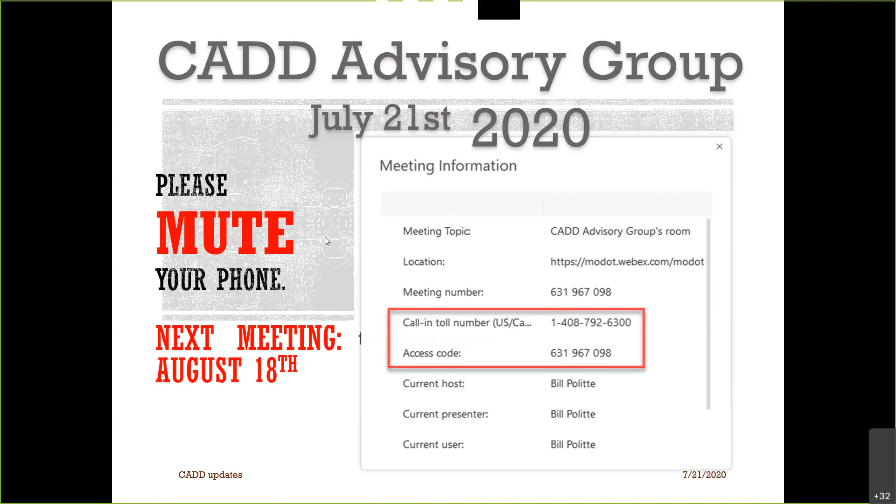Okay, got a few things we're going to go over today. I'll get to them when we get to it, but I'm going to keep this going with the support working from home thing. The email is the best way to get a hold of us. You can email us at CADD support and we'll all get the email.

Or if you have a specific problem, there'll be a slide at the end that shows all our disciplines, and you can contact us that way. Another way is instant messaging - Skype works really well, and Microsoft Teams is working out really well too. We can share screens and see what you're working on, and that stuff is really handy for what we need to do. So we'll keep doing that.

Classroom schedule - there's no face-to-face classes scheduled for August. I don't know when we're going to go back to the classroom thing, but we'll let you all know when that happens, and push out some mass emails on that.

I'm going to leave this in the PowerPoint. The month's videos and PowerPoint will be placed on the Geopack blog, and there's a link to it on this page as well. So I'll leave this all on the blog, and you'll be able to access the PowerPoint, click on these links and go. There's a lot of stuff out there, especially on our CAD services page and the blog page.

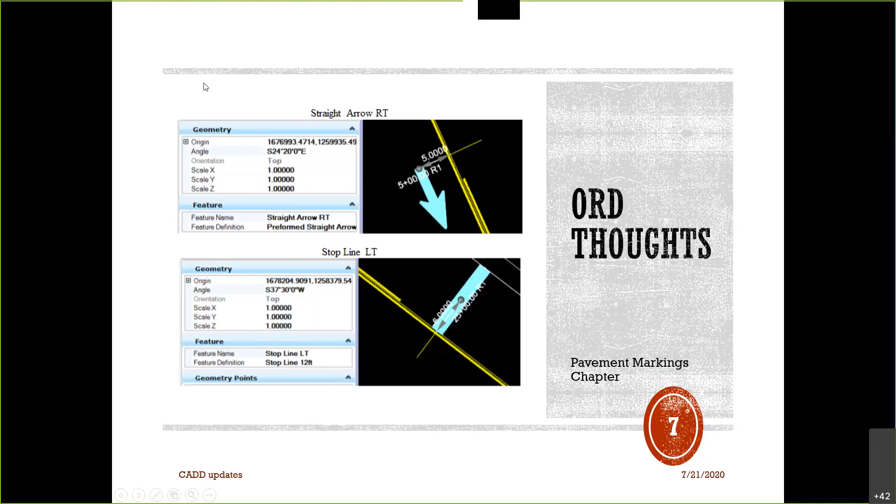More ORD thoughts. Right now when we cut cross sections and create our PDFs, our cross sections are created from the bottom left and go up. So if you're doing multiple cross sections, you start at the bottom, go to the top, then move to the next row and do the same thing, going as many rows as needed, squeezing them all in for your sheets.

We've got a request to change it so we go from the top to the bottom instead, then move to the next row and do the same thing all the way down. This would let you open a PDF and scroll through, seeing each stationing at the top all the way down, instead of having to move to the bottom of the sheet and back up to the top for the stationing. So it's another one of those thoughts we need your comments and input on, on what would be a good resolution to this. Just throwing that out there.

Okay, so that's basically the pieces I've got to say. I'm going to show a video here and hope it works out well. I'll have Shannon or Kevin give me a yell.

I'll say a little something about this. This is what Bill's getting ready to show, the AQCESSRAMP demo from Transoft Solutions. I recorded a video because our demonstration license runs out today and I wasn't sure it would actually work for us today. So this is just going to be a video, it's out there on our YouTube page as well. It goes through a bit of what it will do. It deals with ADA ramps, so if you're creating sidewalks or anything like that, this would really help in creating ADA ramps to get your elevations and widths of pavement and things like that.

Bill, did you share this with the video version? Does it look bad? No, I don't hear anything. It looks good but there's no sound, Bill. Okay, you guys can't hear that? Let me try something different. Hey Shannon, did you mention that we don't own this software, that we're just demoing it? I think you said that but I wanted to point that out. Yes, correct.

So Shannon, if he can't get the sound going, do you think you can lip sync to it or not? Oh, I'd rather not, but I probably could, I guess. There it is, I hear it.

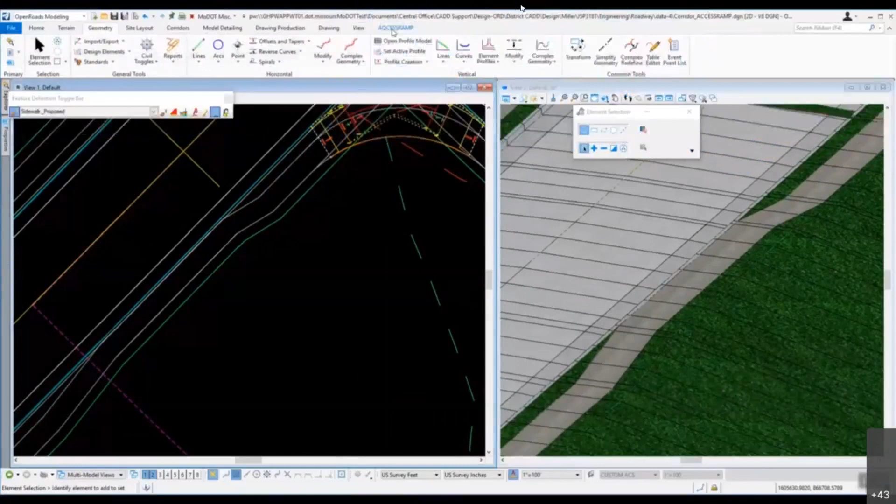A new program called AQCESSRAMP. You guys hear that? It's by Transoft Solutions, the makers of AutoTurn, TORUS Roundabouts, and the Diamond Interchange tools that we currently own and operate.

When it's installed in ORD, you can see it's got its own ribbon area. When you expand that out, you'll see all kinds of different tools, similar to the rest of the Transoft tools. First you have settings, which will load up the license and the program, and your normal program settings for dealing with feet or inches. Then there are design guidelines - right now I just have Missouri DOT and the ADAAG, the default from Transoft. As you can see, they've been working with a lot of different states getting their standards, and we sent them our standards some time back, so they're using our curbs, curb heights, and different curb types to create these access ramps. Overall, the tool is designed to create all the line work and even a surface for an ADA compliant sidewalk or curb ramp in different locations.

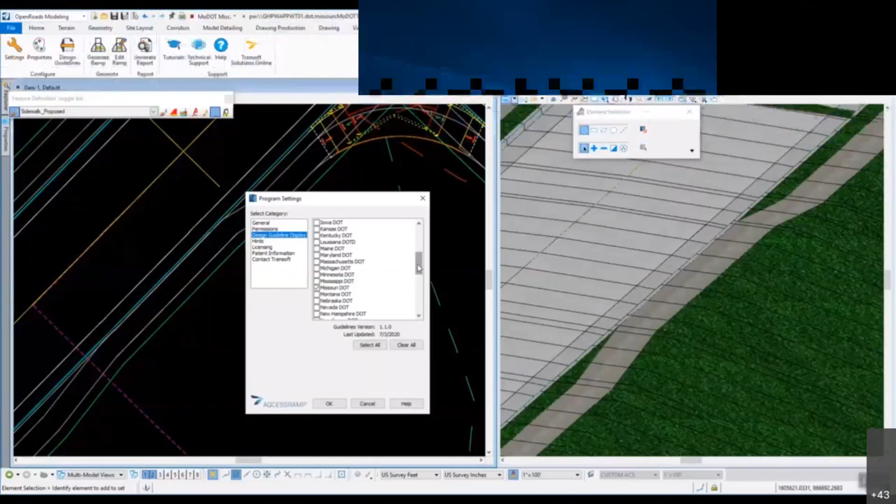You can see I have one drawn back here already. The one I'm going to show deals with this location where I want an ADA ramp that might go across a curbed roadway. I created one here earlier that also does the arc inside a radius return for an intersection, and it completes all this information. You can go modify it after it's been placed, modify the length, modify the elevations of certain points on there.

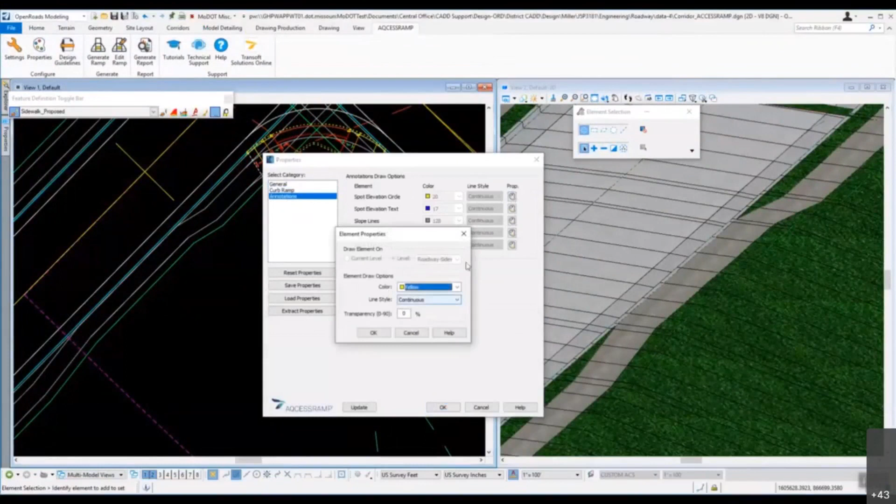Most of the rest of these things are just informational in here. Then there's properties, so we can go in and set up different levels that these things go on, set up the colors for the curb ramps, colors for annotation. All you have to do is just click on the little palette that they have out there and change any of the information that you see here.

The other thing here, design guidelines. If you wanted to make your own, if you didn't like the ones that came with the software, you can copy one of these and make any changes you want, or create a brand new one even, or even just take a look at what's involved with one.

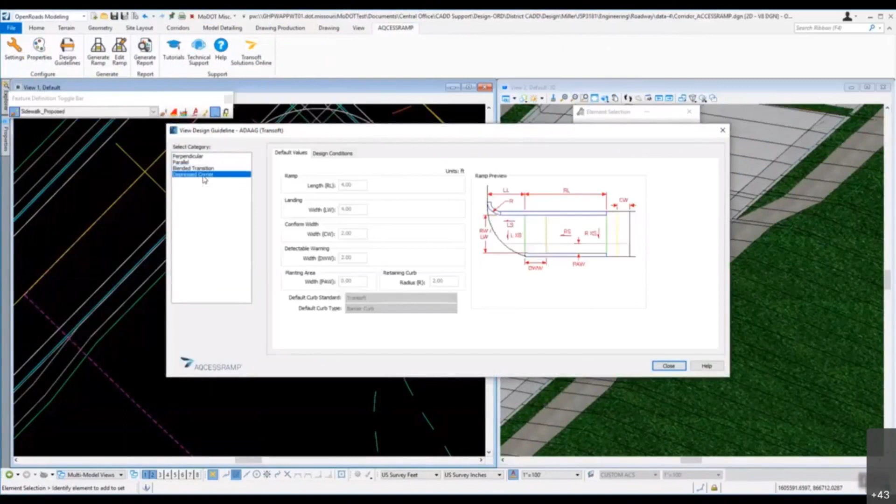So you can kind of see these are the different types that are in the one we've got selected here, perpendicular. That's the one I'll be trying to do here or show. It'll have the flares and all the information for creating that based on the Missouri DOT, but the shape and everything can be created from the Transoft solution one.

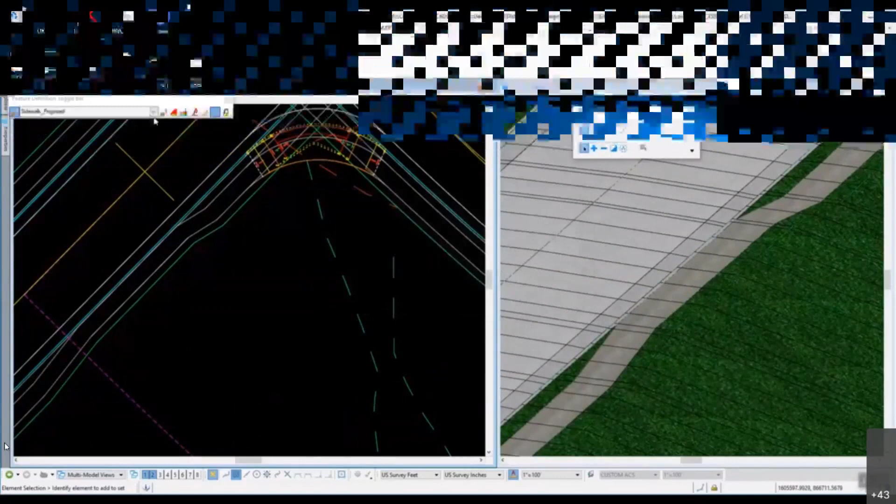So you can mix and match different things. The other options you have in here is to generate the ramp, edit the ramp after the fact, and generate reports. It even comes with tutorials and some help that you can get from this.

The edit ramp, I find that sometimes when you come into an ORD file, it doesn't automatically always let you just select the ramp and edit it. Sometimes you have to go out and come back in, but in this one it'll probably allow it.

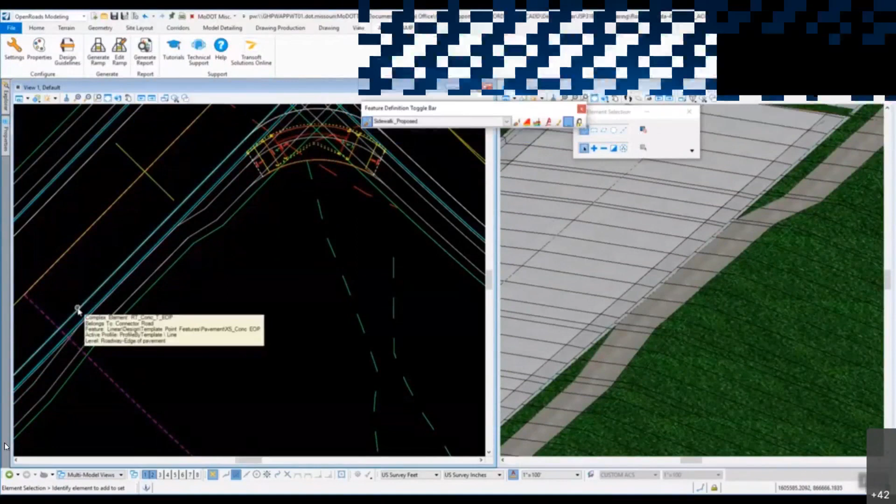So what I've done is I've got roadway out here that has curb information on it, and elevations are based on the corridor, and then also in that corridor we have a sidewalk, and I've just done a small area right here where I've done a parametric constraint.

So we've got a normal sidewalk coming in. I want the sidewalk to meet up with the curb here and then come back out. So I've just got a little parametric constraint in there to allow us to put in our curb ramp through this section. Okay, so I do have a couple of lines drawn out here.

There's a line right there that represents the back of the curb and then also the front of the sidewalk. And then I've got one here that deals with the back of the sidewalk. As you can see, this is just the regular one that comes with our templates. It's got a buffer here, a sidewalk, and then another buffer.

So just to show how this works, we've got the generate ramp tool. And that's going to pull this information up to say what kind of guidelines do you want. As far as the shape goes, the ones that come with the program are pretty decent shapes.

And then what you can do is come down here and select what the curb standard is after that. So for our curbs, we can use the Missouri DOT ones. And that'll give a list of the different curb types that we have for Missouri DOT. So I'll just do a type A gutter in there.

And then it says, well, what do you want to anchor this on? So you have all four different things in here that you can choose from to anchor your curb information to. We'll just do the back of the curb. That's the line that I have drawn out here.

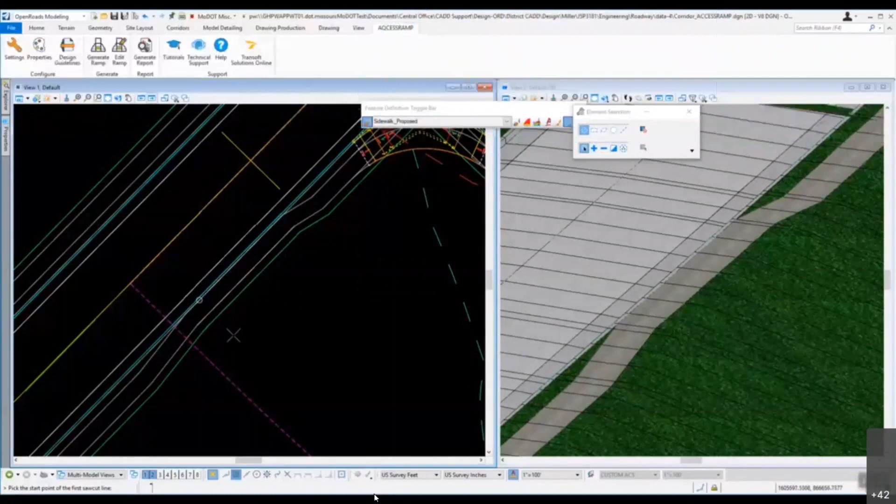And it's looking at the sidewalk proposed, so we've got that as an elevation. So we'll say okay, and then it wants to know where your saw cuts are going to be for placing this. You can just left click a data point on there. You can move these saw cuts at any point. So we're just going to come out here, go beyond the sidewalk area, and click it in there.

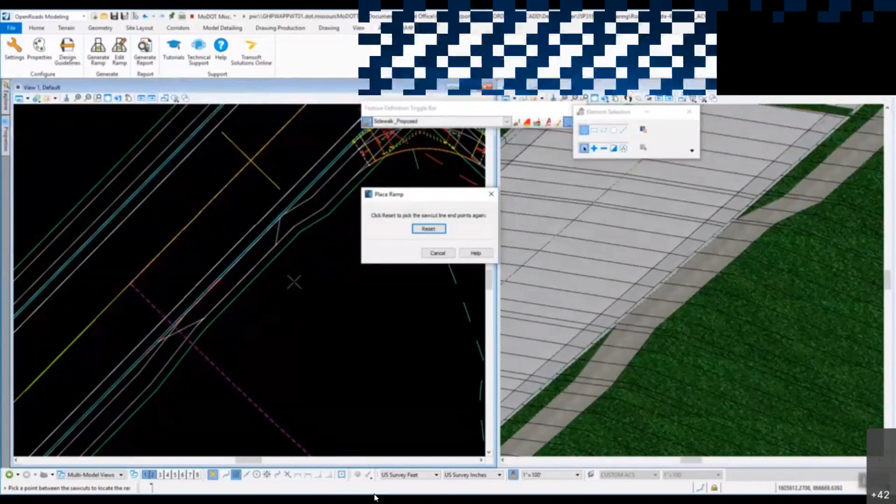Then it asks for the next point, so I'll left click in there. You just have to be in between these two lines to place it. If you go too far left or right, you'll see red text appear that says it can't do it. So we're just going to left click and place that in here, and it will start to place that curb ramp.

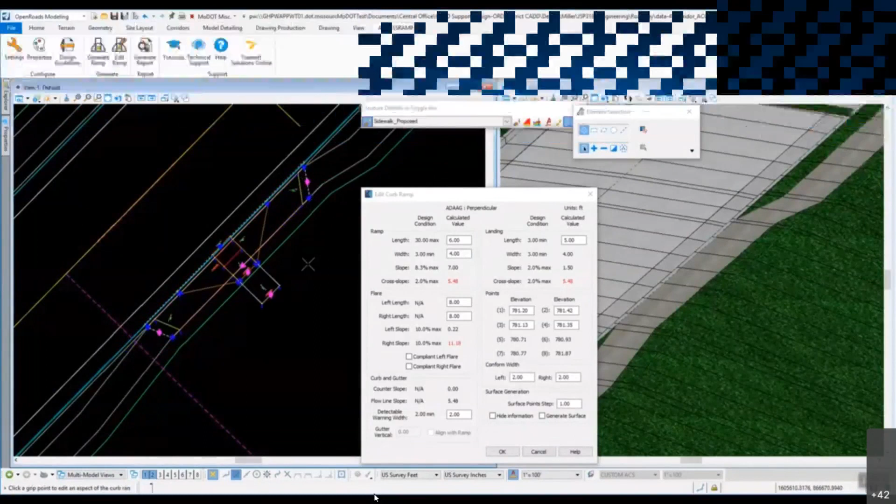And once you get that in there, all this information is adjustable. You can click on the different parts and change them around. So that initial placement, you don't necessarily have to worry about getting it perfect. You can come in and create those.

Now there's different parts in this curb ramp that you can modify. This edit ramp also just brings back up this edit curb ramp dialog. So the first time when you place it, it's really just switching to the next tool to edit the ramp, and then you can make all the changes you want. If something's in red, then it's out of compliance and you have to do different things in there to modify that or change it.

One thing is you can create compliant flares. So you can go ahead and check mark that and it'll adjust these flares to make that slope reach the max or be under the max.

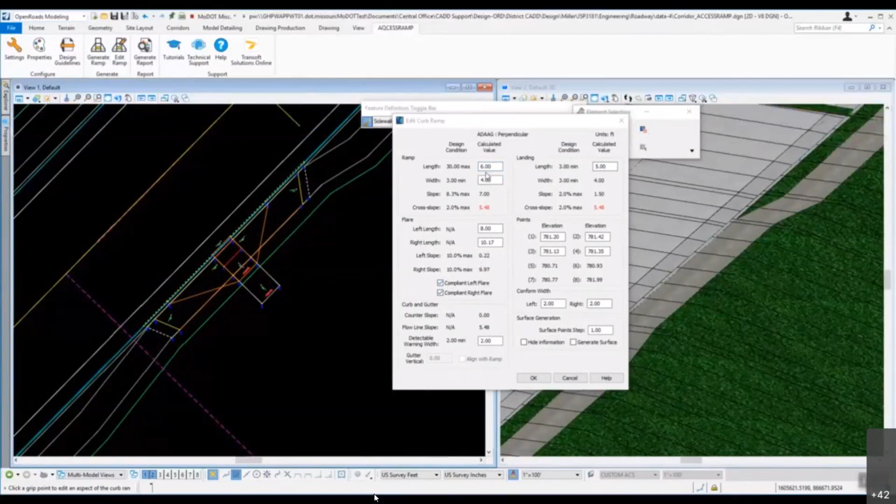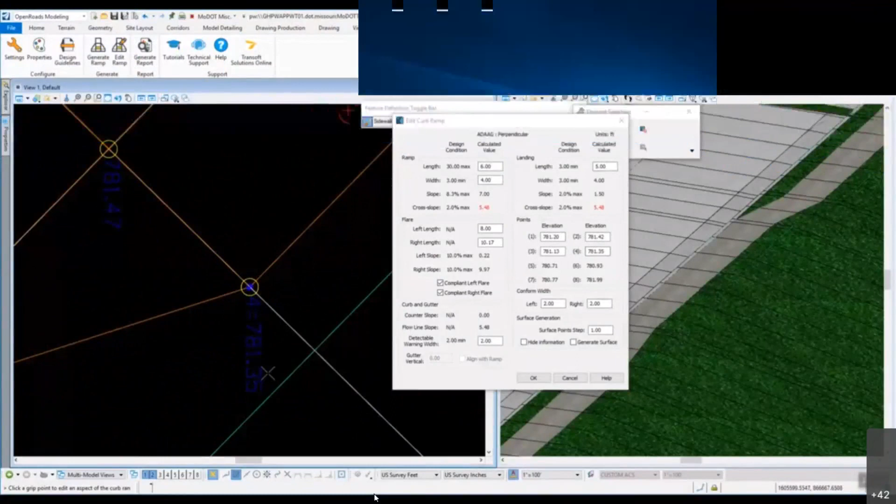The other thing is you've got cross slopes up here. You can zoom in at this location and see that there are certain things you can change, like these elevations throughout here. So we've got an elevation for our outer points, and then if you zoom in you can see 4 equals that information. So here's 4 - if you wanted to change the elevation at that point, you could do that. That's all you do - you end up changing these elevations and getting your cross slopes to reduce.

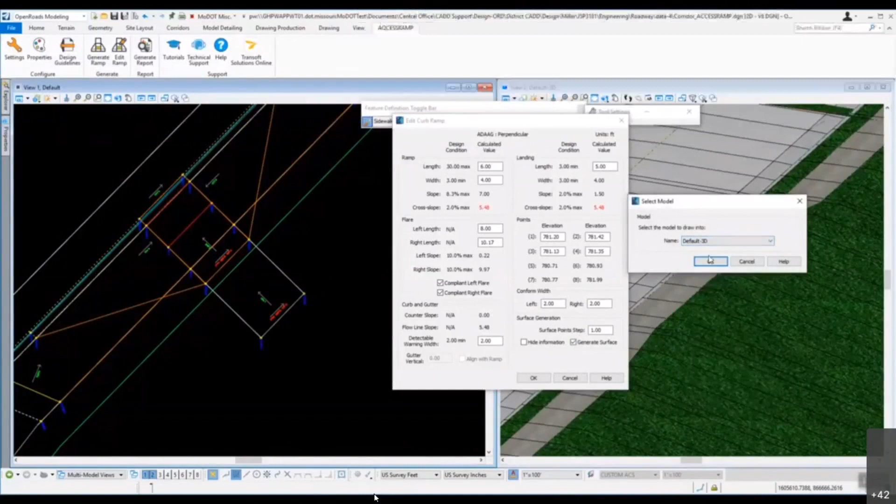Down here at the bottom, you also have this generate surface option. You can turn that on and it'll ask where do you want to see the surface. I want to see it over in the default 3D, and it'll go ahead and create a surface out there for you that you can use to clip out, trim, whatever you want to do. So if you say that you're good with this one, you can go ahead and click OK.

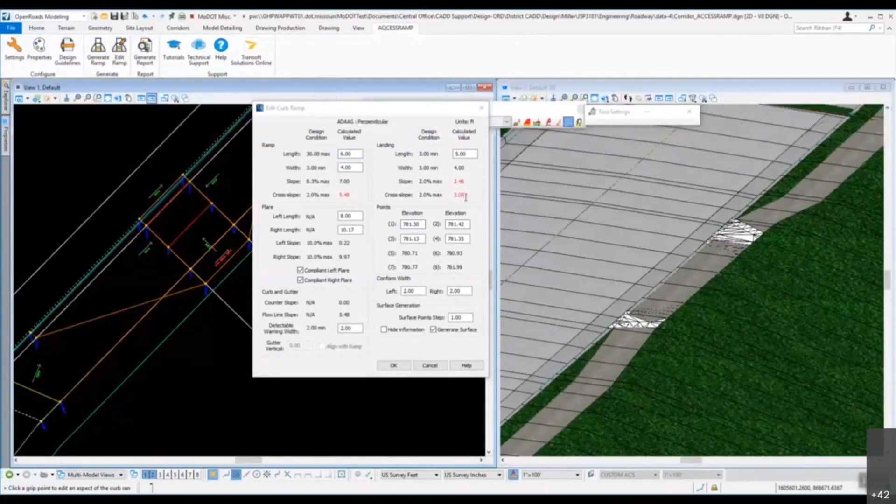Later we can come back and modify that, but it's created that surface for us. If we go to edit ramp, all you have to do is pick on any area on that ramp and it'll pull it right back up. So if you needed to make adjustments to this, you could do that at any point. As you can see, if I change that elevation, it puts that cross slope down, but then it makes the other slope percentage go up. So you just have to modify these elevations to get it the way you want it.

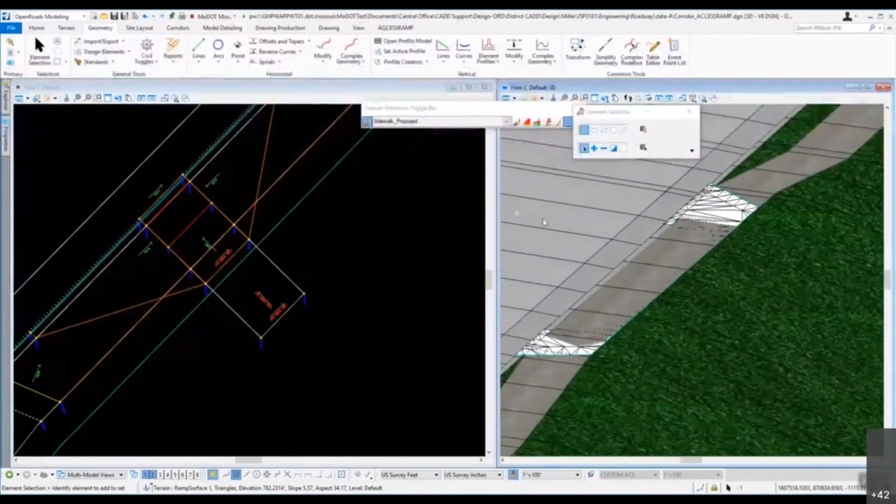Okay, if you look at the 3D that it created, I'll just go back over into the 3D. It's created this surface out here for you. With this just being a regular surface, if I click on that, you can get the heads up on it. You can see you've got all the surface tools - you can make it active, you can export it out, you can even put a pavement template or something like that on it, just like you can with our regular surfaces.

The other thing you can do is clip out. So if I want to zoom out just a little bit and say I want to clip that sidewalk out, you can hover over the grips for the corridor, come into our regular clipping tools, add a clipping reference, and you can come out and select that surface. And then when you reset, it will go ahead and clip out that sidewalk and put in our new sidewalk surface that will overtake that.

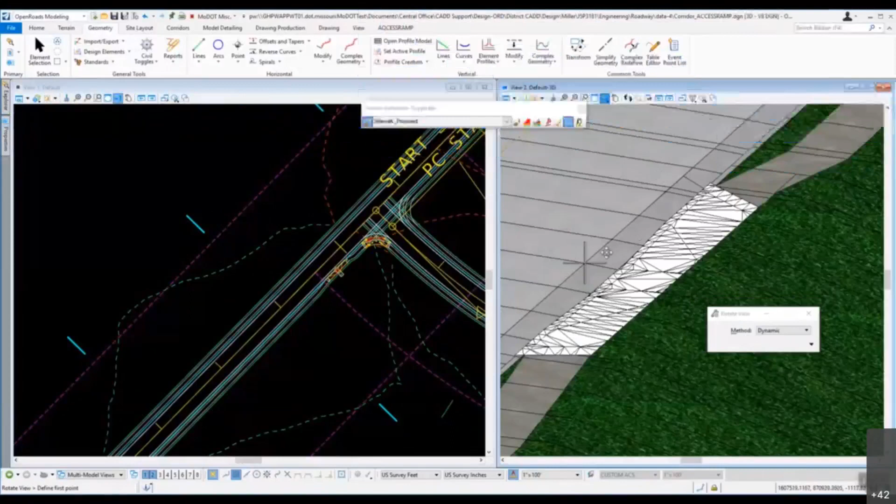So if we want to take a look at what that did for us, you can see that it has created a curb ramp right in there for us and brought in the curb, slid it down. Now we've got that opening right there, and as you can see it's gone back up and met the sidewalk on either side. So it's not too bad - it's got a little glitches here and there still every once in a while. You can see in the surface back there, it kind of changes it up a little bit, but we can make modifications to that.

It would be a short little modification, really easy to create the curb ramp, and then just go modify the surface a little bit if you need to. So you can see that would save you a lot of time trying to create this model by hand.

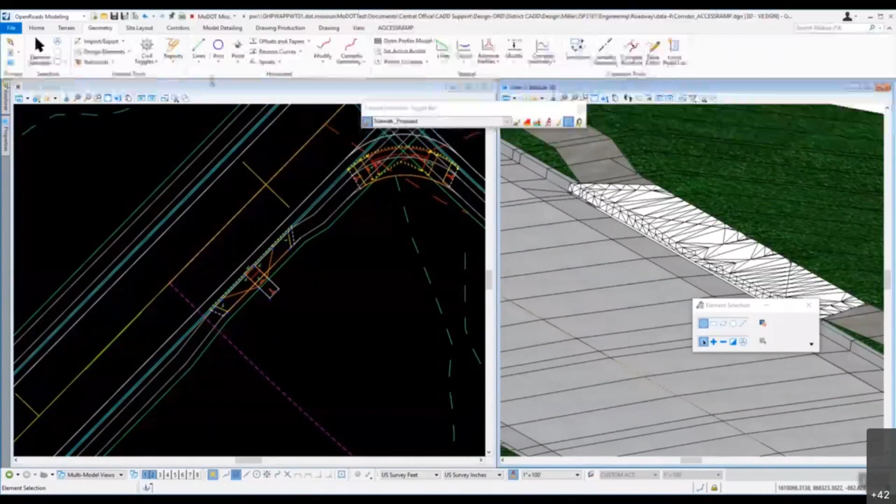So you can kind of see how that tool works. It's a really neat tool. We're looking at it right now. I think we may hopefully get to use it some in the future. I don't know how much ADA we do currently, but if we end up doing a lot of ADA, this tool could really save some time in creating that. If you had just a sidewalk project, this could be a lifesaver trying to figure out how to create these surfaces.

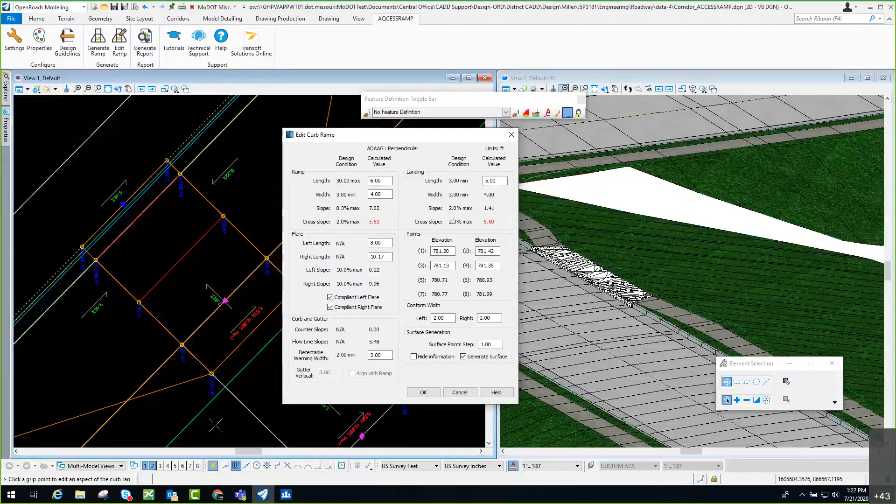One of the things it did create out here for us is a report. So if you do a generate report, probably have to close that one out. I don't even know if it'll do it in here. We'll see — now that's what I was talking about earlier. Sometimes it won't let you pick that curb ramp, but I do actually have that information saved out here to show you what it did.

It makes two different CSV files. You've got one that'll do a demo for the points. So if I open that one up, this is one of the reports that it creates. It creates a northing, easting, or XY, and an elevation for all the different points that it took to make up that access ramp. So that's one of the reports.

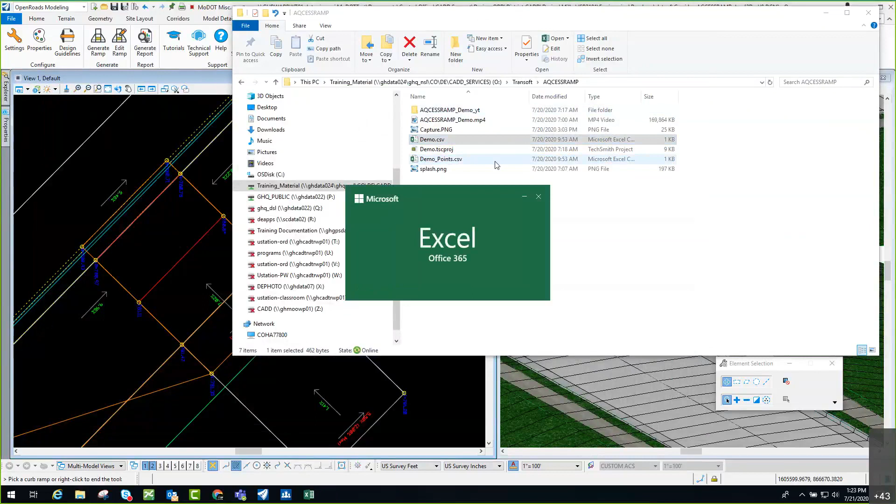And then the other report is basically what you use to create the ramp with. So open that one up, and it's got basically how did you create it, what's involved when creating this one. You use the ADAAG design guidelines and so forth to create it. So those are the reports I wanted to show.

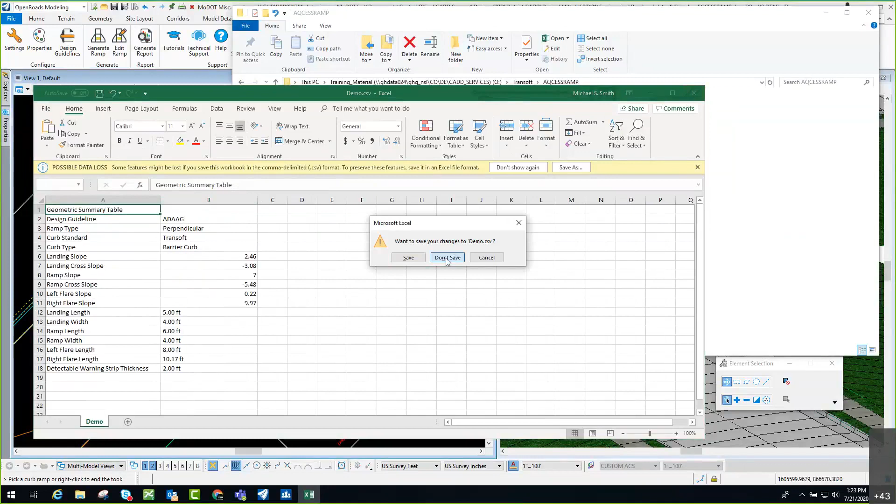It's really not difficult, I think, as long as you have your information in here correctly where you want it. On mine, I drew a line over the top of my sidewalks, and then I just projected that profile up to those lines to create it. But you could do what you wanted to with this — you could use the sidewalk that comes in off of the corridor, and it pretty much gives you the same thing. The only reason I like to draw lines for something like that is I have more control over it.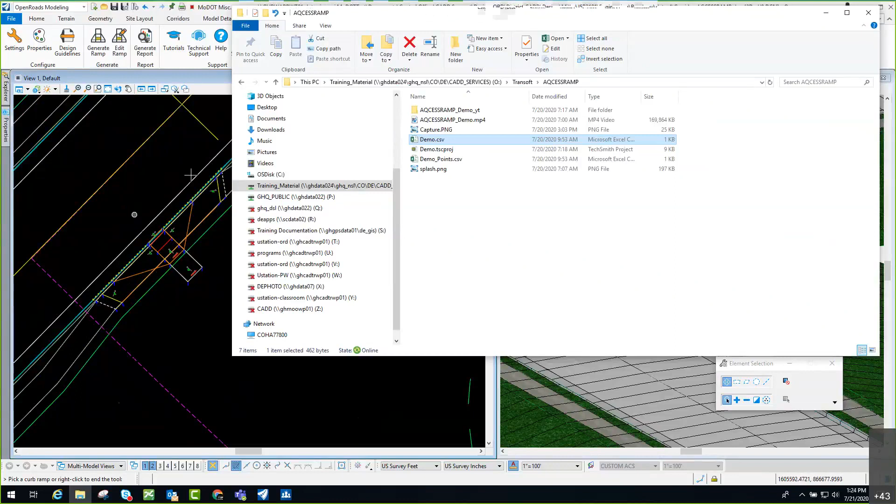I could go in and change that profile that is on those two lines, and I wouldn't have to try to figure out how to change the whole corridor — I could just change those two lines. But there's all kinds of different ways to do it. The one that was up here is pretty good too.

Now this one I just used the arc tool, the simple arc, and connected the sidewalks and the curb data, and then just created it along there. Really it's the same thing — I selected these two arcs out here to create that, and it goes ahead and places it.

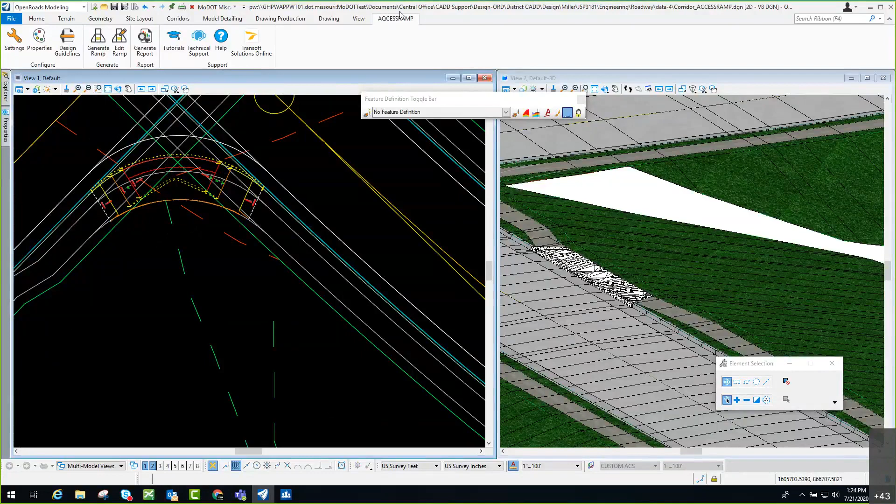So I don't know if you can hear my kid in the background, but it's like daddy daycare here, always, all day. But good stuff — maybe you guys have the same thing going on. I don't know, but you probably don't have Spider-Man jumping around in your living room. But that is what I had to show on that one, and I will stop sharing.

For those of you that may be unaware, MoDOT maintains a network of what are called real-time kinematic, or RTK, GPS base stations. RTK allows users to get a very high accuracy signal from a GNSS satellite.

GNSS is the umbrella term for things like GPS, which is just the American GNSS. Modern GPS receivers can also receive position signals from the Russian satellite network, the Chinese satellite network, and the Europeans.

So what the RTK network does is it collects the satellite information and actually broadcasts a corrected signal in real time. Those of you that have used any kind of GPS receiver, including your smartphone, may know that the accuracy on those can be up to 3 meters.

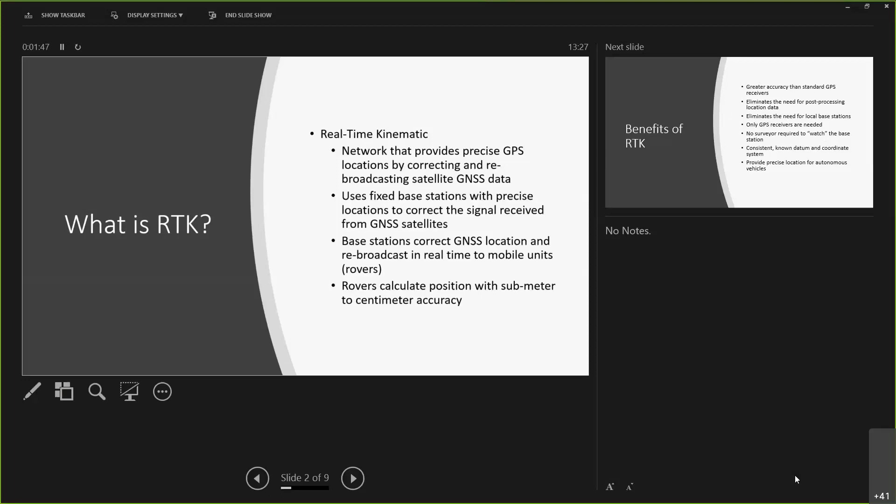However, RTK can calculate and broadcast the position in real time, on the fly, that is sub-meter and usually within a centimeter of accuracy.

This has a lot of benefits for the state of Missouri, and every designer has probably used RTK and may not be aware of it. RTK is primarily used by surveyors so that they can collect high accuracy field shots without the need for what was called post-processing the data.

In the past, surveyors or anybody else would have to collect their data, then take it back to the computer, post-process it, and compare it to these RTK base stations, and then they could get a corrected position. However, RTK can do this on the fly in real time.

It also eliminates the need for local base stations. That was a workaround for surveyors, where they could set up project-specific base stations that would have a corrected signal. It's also a real benefit for things like precision agriculture, and in the future, when it comes time for autonomous vehicles, we'll rely heavily on RTK.

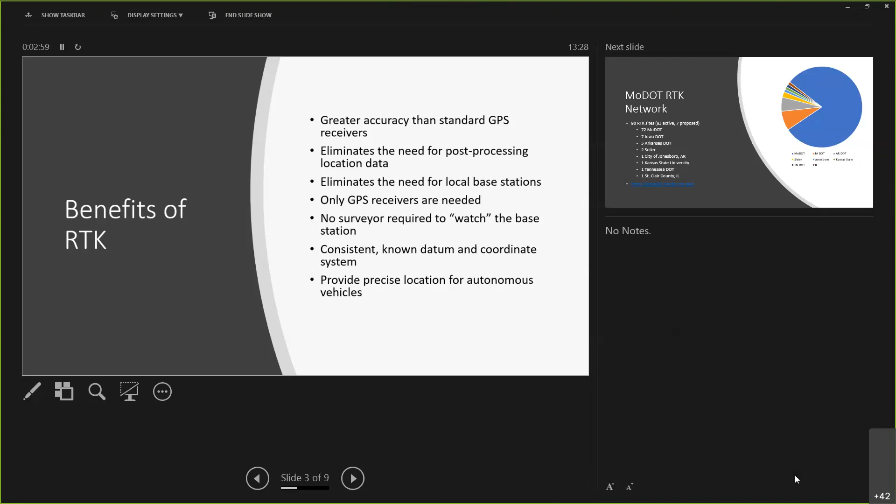So a little bit about our RTK network. MoDOT has 83 active sites and 7 new sites that we hope to bring on. You can see kind of a breakdown—most of those are maintained at MoDOT maintenance sheds. There are a few, though, that are maintained by the Iowa and Arkansas DOTs, and a couple by other entities.

I included a link at the bottom there, and I'll give a demo of our GPS network shortly. 63 of our RTK sites are part of the National Geodetic Survey, which is a sub-agency of NOAA. This allows the signals from the base stations to be uploaded to the internet and stored for 30 days so that people can access historical GPS data.

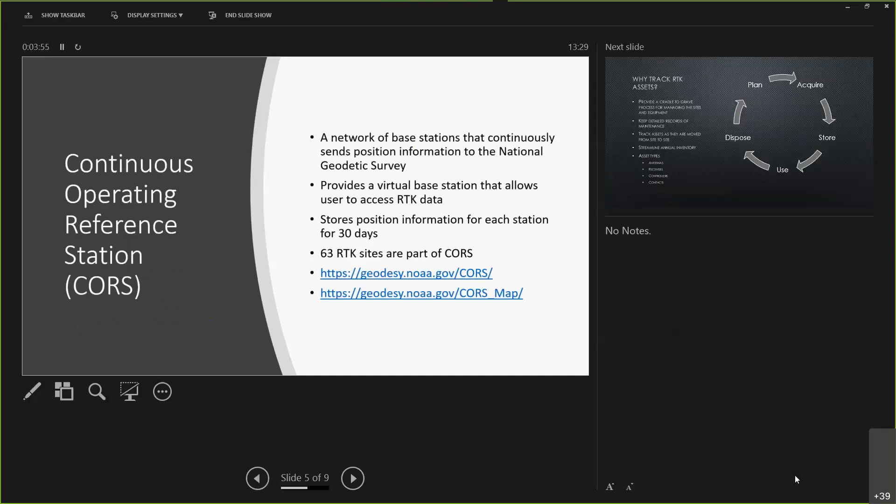Getting to why we're presenting today about asset management: in the past, we had a list of our RTK stations and all the assets included on those, like in an old Access database and other kinds of Excel spreadsheets.

The problem is that deploying and maintaining these sites can be very labor intensive, and there needs to be a process to track these assets and make sure they're within their useful lifespan. A lot of times the antennas go out and need to be changed, the receivers need to be changed out, or they get swapped to different sites. This created a logistical headache for the CADD service unit to manage not only the physical inventory, but also when sites were serviced, when equipment was serviced, and what equipment was reaching its end of life.

So we created an asset management database that is spatially aware, so that we can plan for the acquisition and disposal of new assets, track the service performed on sites and equipment, and plan to dispose of that. It will help for work planning and budgeting in the future so that we can have a more precise picture of what we need to replace and maintain.

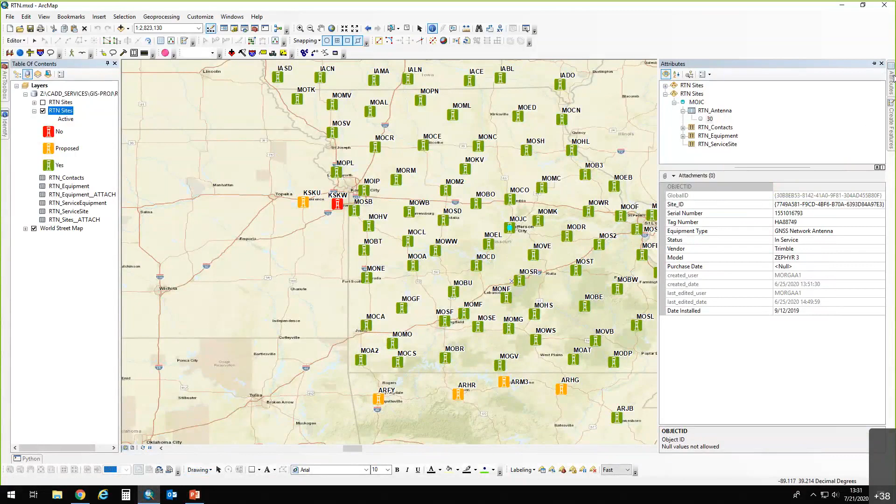Another benefit to this, as opposed to having something in Access, is that we can send somebody out with a laptop, or in the future hopefully a tablet or an iPhone, and they'll be able to track the assets and the maintenance as they're working on the site.

So you can see here we have information about each site. I'll include the site here in Jefferson City—we can see that it is in service, that it's a Trimble Zephyr, and that it was installed in September of 2019.

You can also track the contacts for the site, so I know who to contact if there's an issue with the site.

And we can also get information about the network receiver to tell that's a Trimble Alloy. We know the firmware, and we know when that was installed and when that was updated.

This will allow us in the future to generate reports and upload this information online, so we have a better picture of what our assets are, when they're installed, when their end of life date is, and we can also work with local maintenance staff more to perhaps perform some corrective maintenance for us.

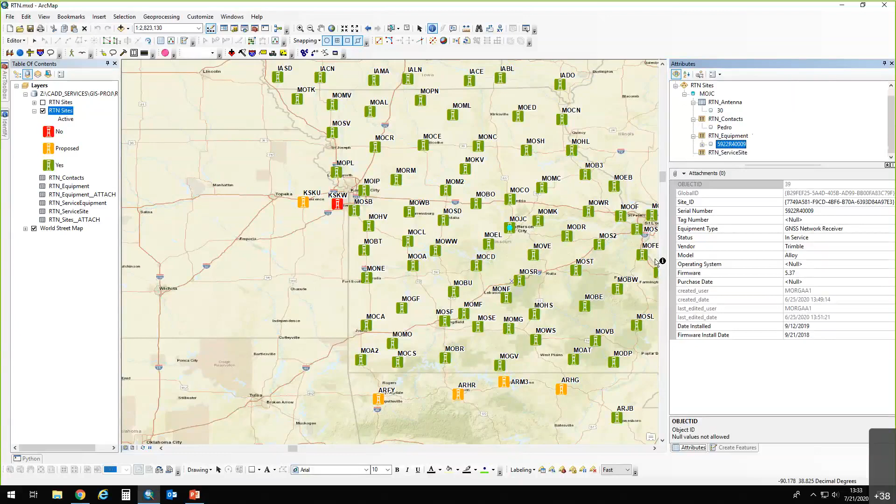This information comes from these receivers connected to the internet, so we can get a live status update on them as well. We can see across all our network receivers, and we can see that we do have a couple right now that are not broadcasting their signal.

So therefore, we can go to our asset database again, contact the local maintenance shed staff, and see if there's any issues at the site without having to physically drive there.

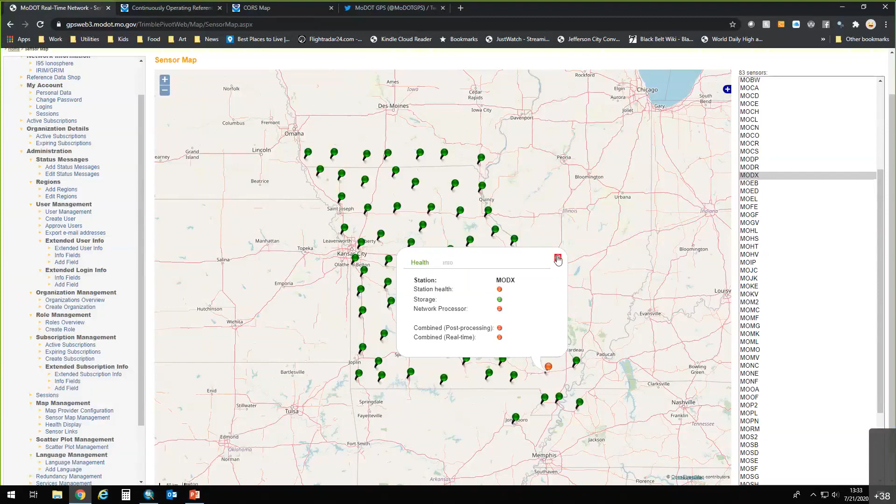In the future, we hope to have a few enhancements that will allow us, as I mentioned previously, to perform work with mobile devices like tablets or phones. So we hope to upload this data to ArcGIS Online and use ArcGIS Collector to collect our field data, and schedule maintenance with a product called ArcGIS Workforce.

We can also aggregate all this information, including the station health updates from the GPS web, to provide a live dashboard using Operations Dashboard. And this will also allow us to automate form submission to the National Geodetic Survey for our CORS sites.

We hope to add more CORS sites in the future. Right now we have to manually fill out forms and attach pictures. In the future, we'll be able to automate that process so we can just print out the forms and send them in. Also, when it comes time for the annual property inventory, we can automate a lot of that just by printing off where our assets are and delivering that information.

And some further information. I will be putting this PowerPoint on our GIS Wiki, which is in the design division under CAD support and GIS Wiki. There, you can also follow the RTK network on Twitter, and you can click on the links to get more information about the National Geodetic Survey or the CORS sites, as well as log into our MoDOT GPS network.